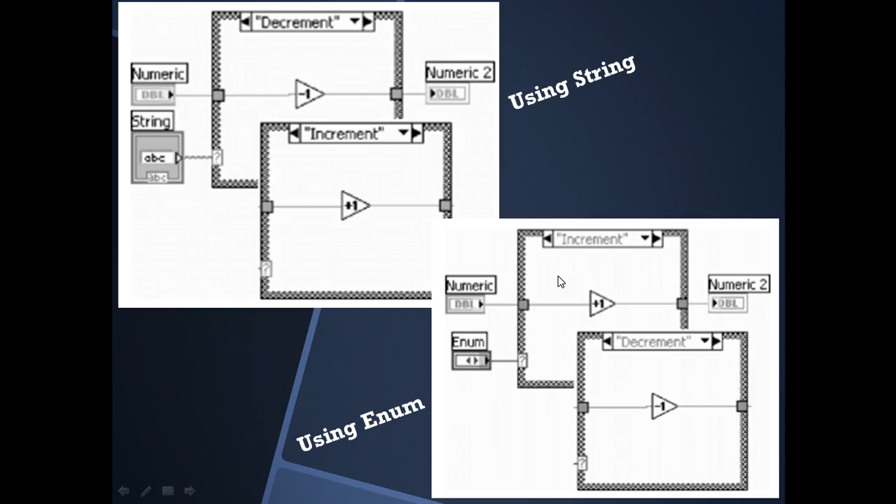This is how the string and enum will look like. For the string, we have to enter a particular name on the front panel. For enum, we have properties where we will declare the values. If we select from a drop down box on the front panel and select any one of them, it will execute that subdiagram accordingly.

We will discuss three examples to understand the case structure better: switching between addition and subtraction using boolean, a simple calculator function using integer or enum, and a seven segment display. We will see these examples in detail using LabView software.

Let us do the step-by-step procedure for creating a switch between addition and subtraction program. Open LabView software and create a blank VI, then press Ctrl+T for equal placement of the front panel and block diagram on screen for better visualization. Right click on the block diagram, go to programming structures, and create a case structure.

Drag and expand it like this. As I mentioned earlier, it will have a true as well as a false statement only.

This is the selector terminal. Go to the front panel, right click, select modern and boolean, then select any one of the switches. Here I am using this switch, and I connected it to the selector terminal.

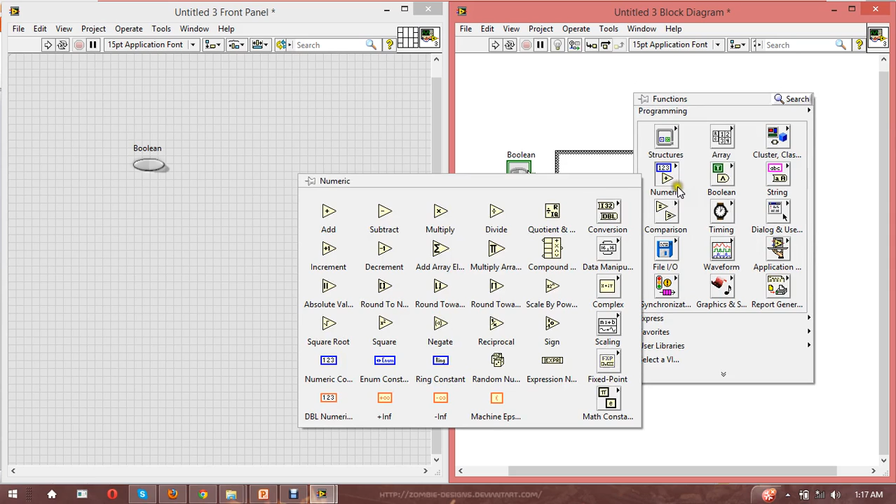Then place the function inside the true and false statements. I right click, go to numeric, and click on addition, placing it in the true window. This function has two input terminals and one output terminal. The same way, I'm placing a subtract function inside the false window.

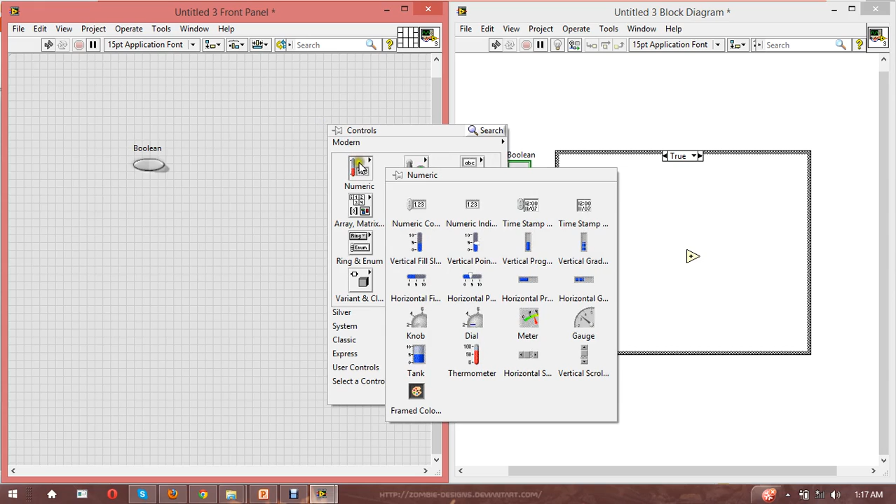For the two inputs, I go to the front panel, right click on numeric, and get a numeric control to place here. The next numeric is required for the second input, so I'm creating another numeric control. For the output, I'm creating a numerical indicator.

Then I'm connecting that numeric control to the case structure like this. Just press it on that case structure, it will attach to it, and I'm connecting that numerical indicator in the same way.

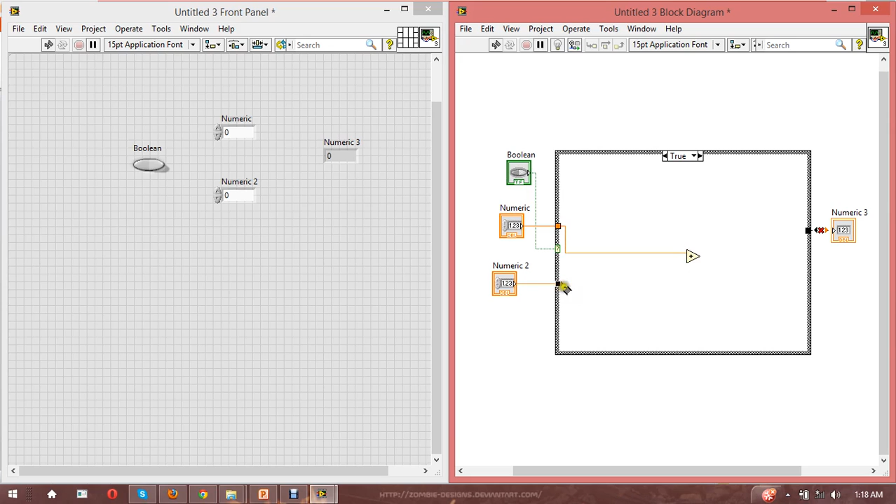Okay, then I'm going to connect the two input terminals to that addition function in the true window, as well as connecting this same two input numeric control to the subtraction function, and I'm connecting the output to the numeric indicator like this way.

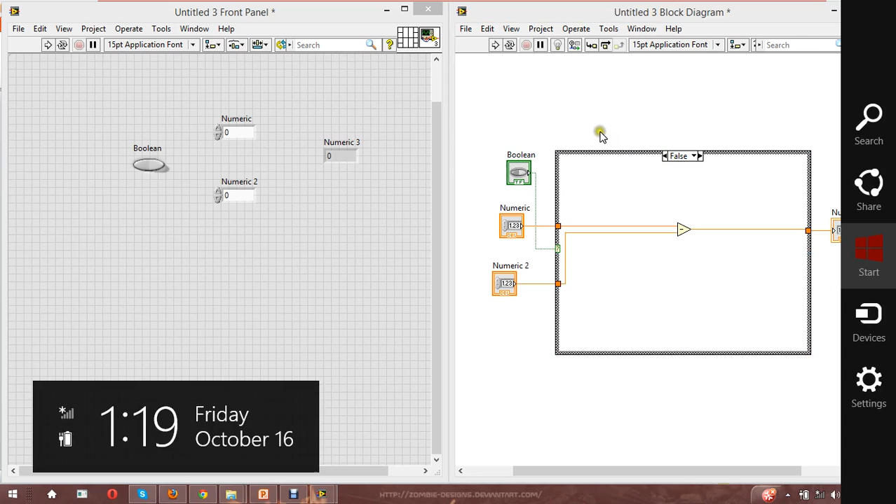After all this, just press Ctrl U for the alignment, and you can change the name in the label as input 1, and this is input 2, and this is an output like this.

For better visualization, we'll go for this one. Right click on this one and click on that view as icon. Same for this one, and same for this one, and same for this one also. This will look a better effect and visualization in the block diagram.

And now I am running this program continuously, and for better understanding we can click this highlight execution icon for the program flow.

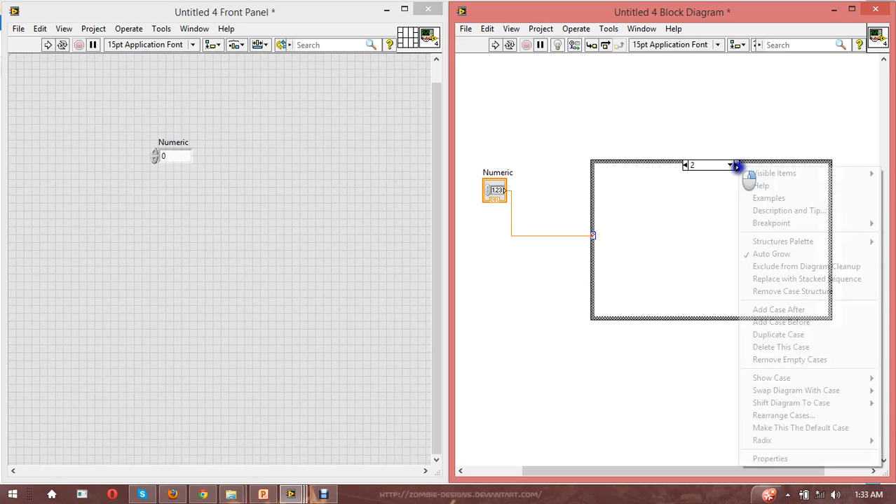Right click on this and add case after. It will add n number of cases like this, and now we can see we added two windows extra, 0 1 2 3, like this one.

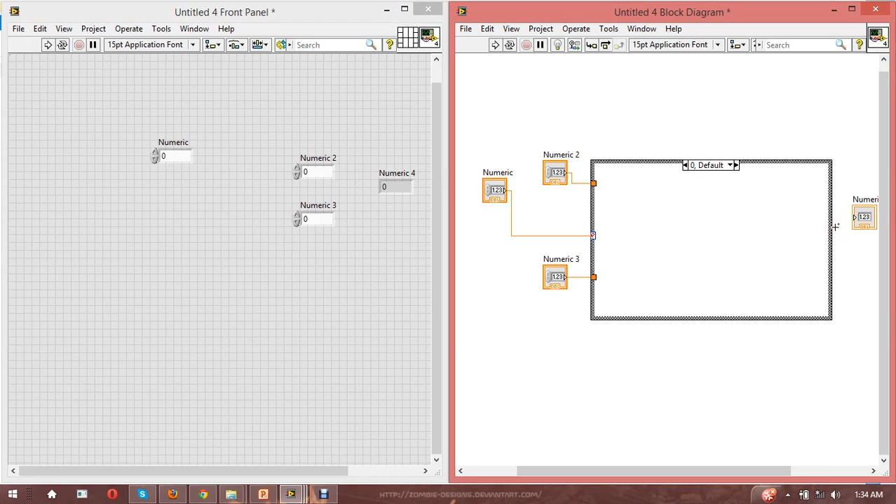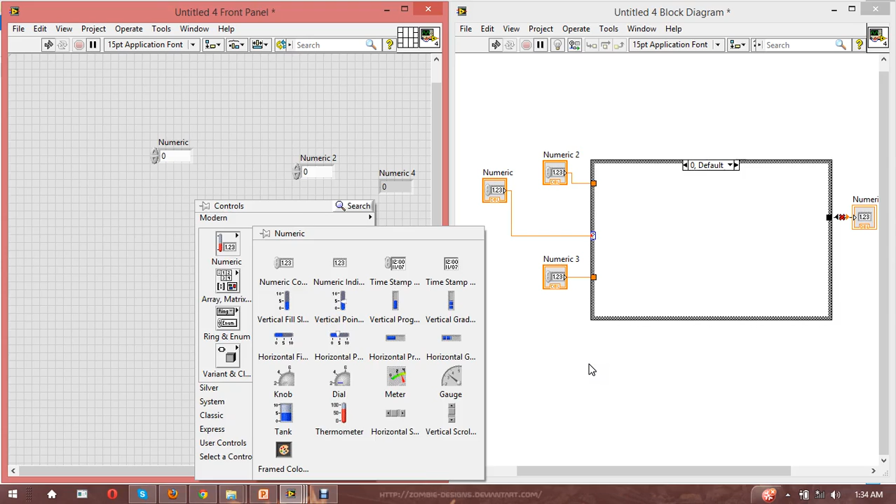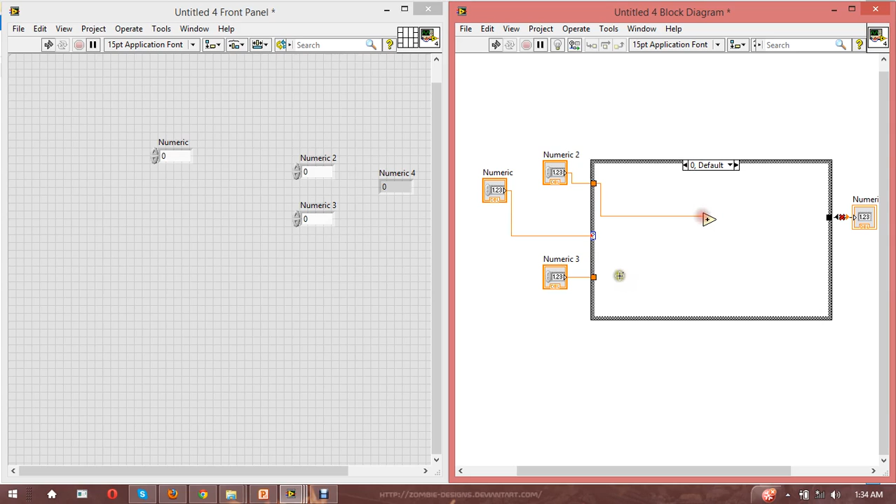The same steps we are going to give two numeric controls for an input like this, and a numeric indicator like this. Hence I'm going to add an add function, subtraction, and I'm going to add like this in way, and I'm going to connect this one like this as in the previous case.

The simple calculator looks like here, I used multiplication, subtraction, addition and division and square function.

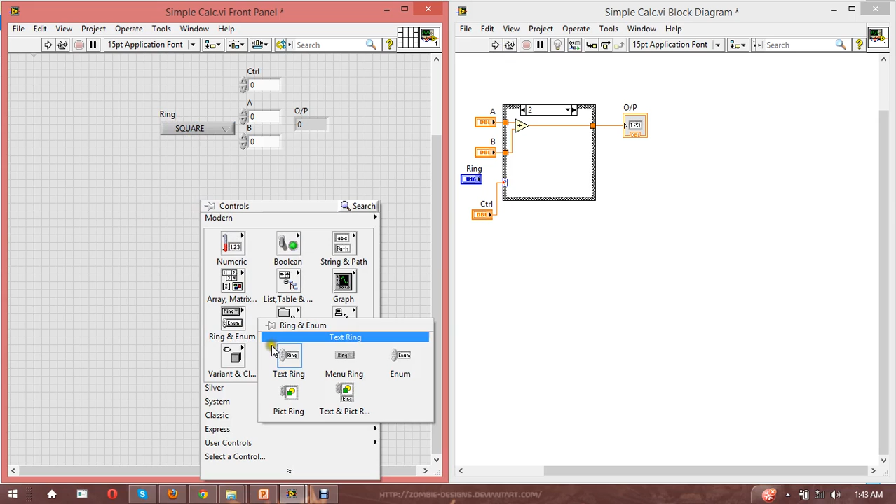Before I run this one, I will explain about what is the ring. For creating a ring, we have to go to that ring and enum, go to that text ring, and place it like this, and right click on this and go to the properties.

It will have an edit items here. Here we are going to insert how many functions we are going to do in that case structure.

After insert, it will come after this one. Hence that we will add n number, and we can add or delete, and we can move it up also like this, and we can move it down also like this, and we have to click OK.

So that I created a ring here. We can give a control to the case structure, or also given a ring to also to the case structure.

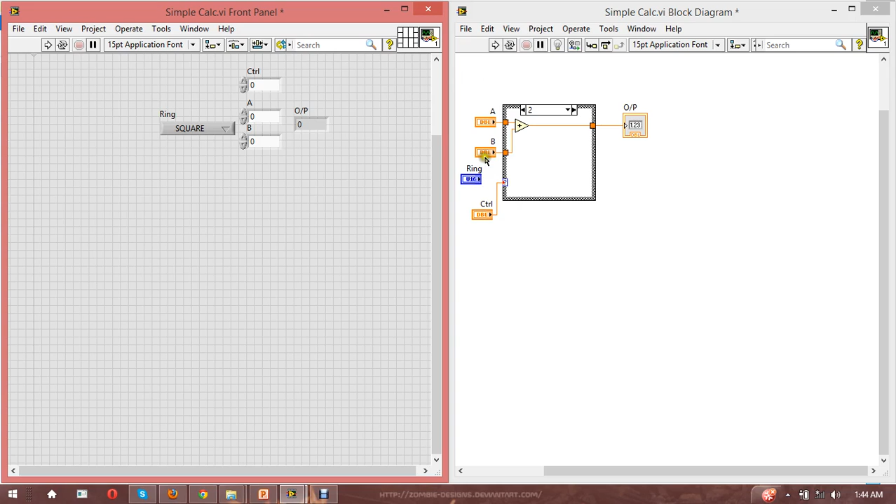First I run it with a control. If I run continuously here, I'm giving an input 5 and 5 here.

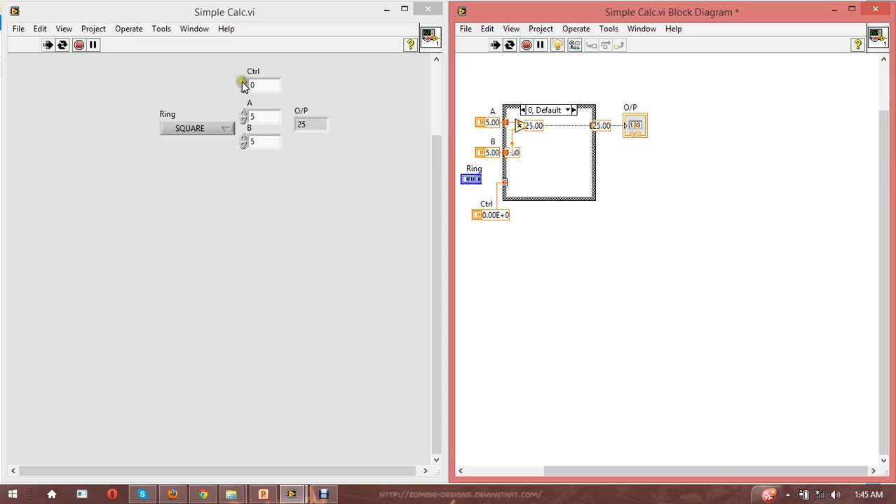Initially I give control 0, which is a multiplication operation, so 5 into 5, the result will be given as 25. Now I'm giving 1. For 1 I had a subtraction function, so I get an output of 0, and for 2 I had given an addition operation, so I get an output like this.

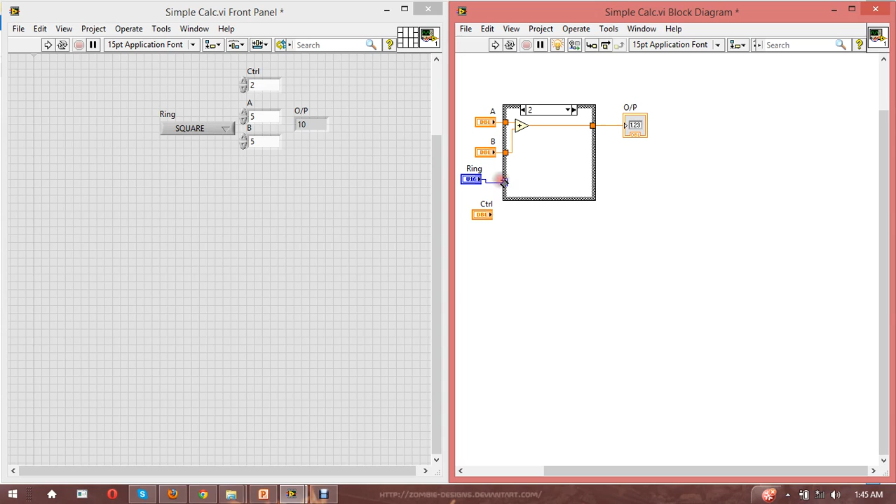So if I connect a ring also, here it will execute the same operation. If I run this one, I can select the operation from the drop-down list box. I am going to select an addition operation here, so I will get an output of 10. If I select a multiplication operation here, I will get an output of 25.

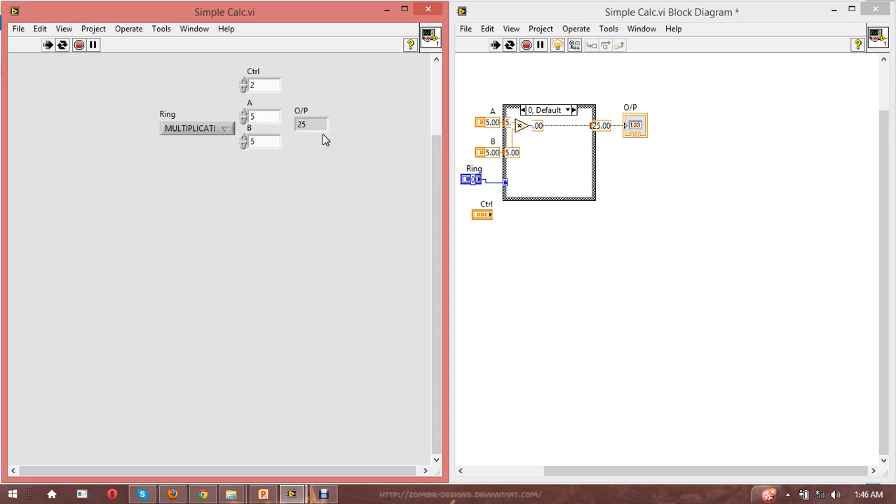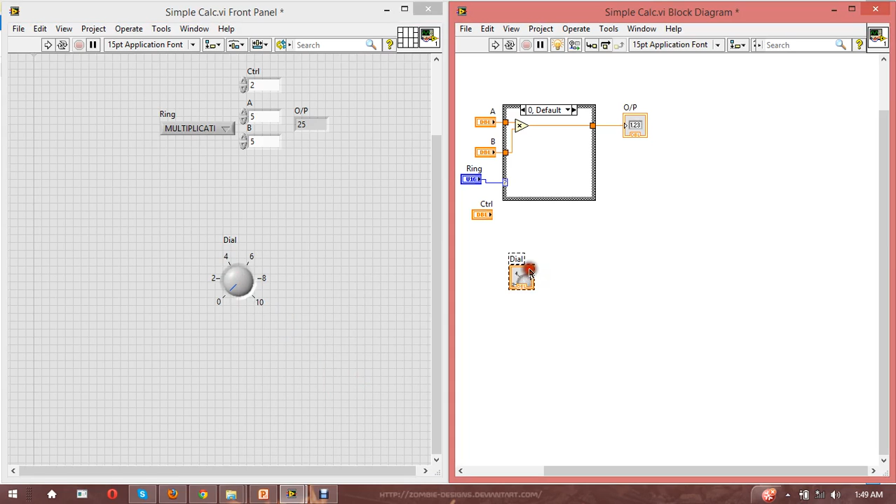And I can do the same operation by using the vertical fill scale, vertical pointer, horizontal fill scale and horizontal pointer, knob, dial. I can use any of these, connect it to the selector terminal, and run. If I select the knob like this, it will run according to it.

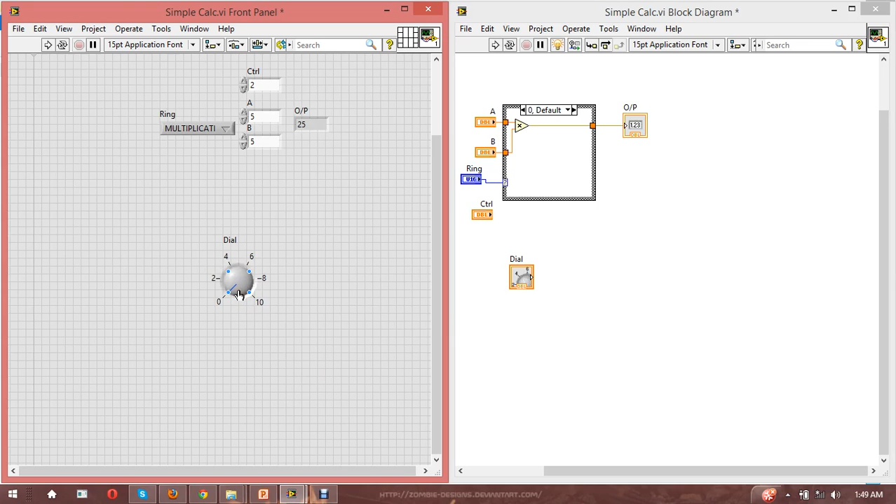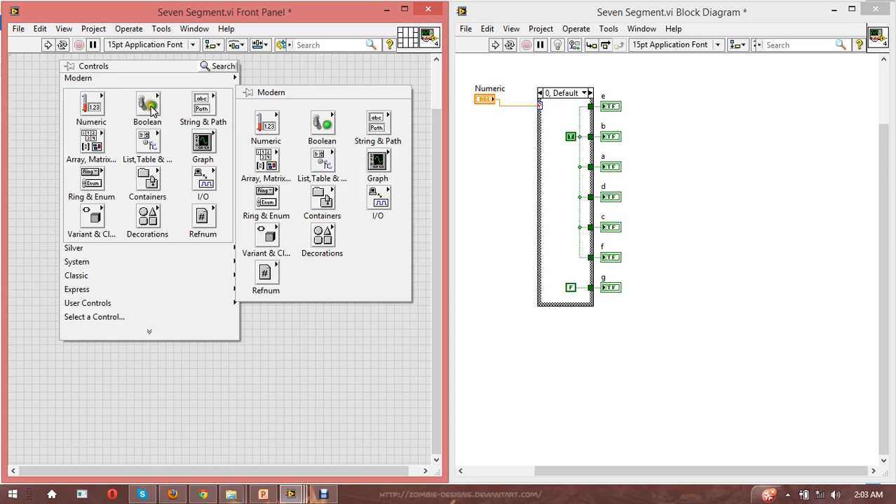Let us come to the third and last experiment, which is a 7 segment display. Here I used LEDs A, B, C, D, E, F, G. I placed them in such a way that they exhibit 0, 1, 2, 3 up to 9. For this, I created a square LED from modern, Boolean. To get this shape, we can extend it horizontally or vertically, and you can place it like this.

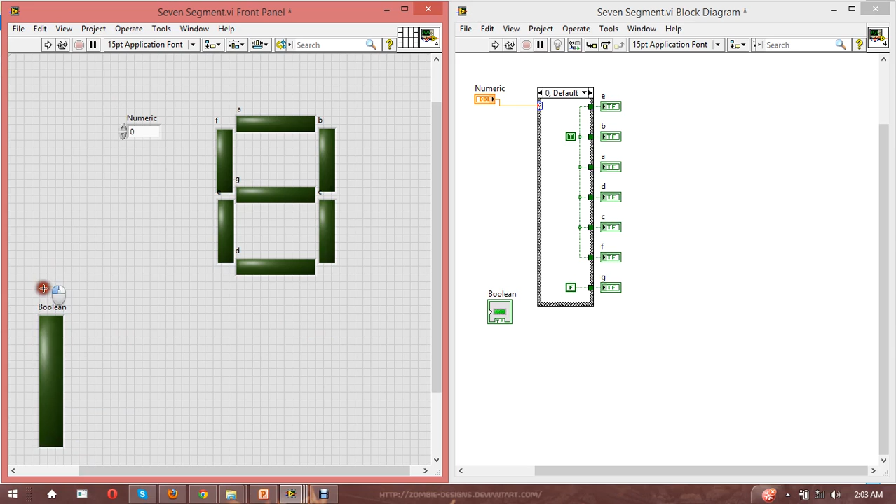And for getting this one, we have to go to Boolean and take true and false constants respectively. I used the true constant here and connected it to E, B, A, D, C, F, and a false constant to G, so that if I execute this, A, B, C, D, E, F will glow for the number 0 and G will not glow, so we get an image of 0 here.

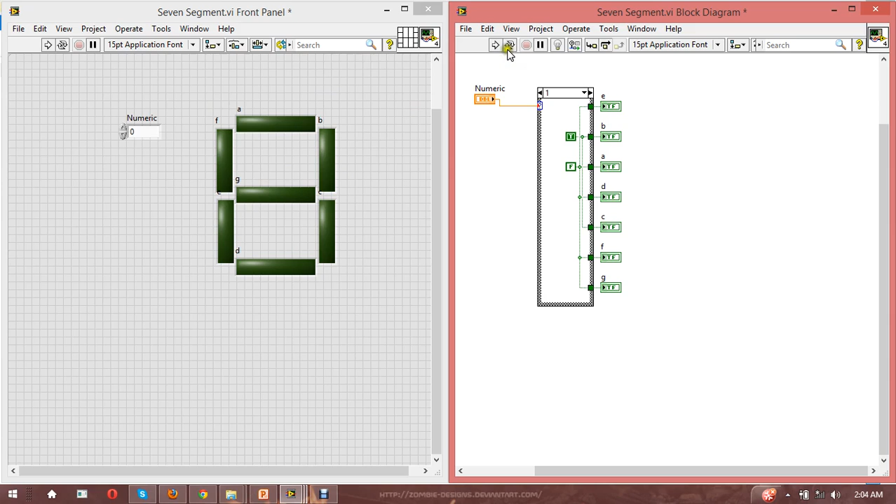And for 1, I connected only B and C to the true constant, and the rest I connected to the false constant, so only B and C will glow and the rest will not. I will show you clearly. Running continuously. See, A, B, C, D, E, F is glowing for 0. If I press 1, only B and C glow and the rest do not.

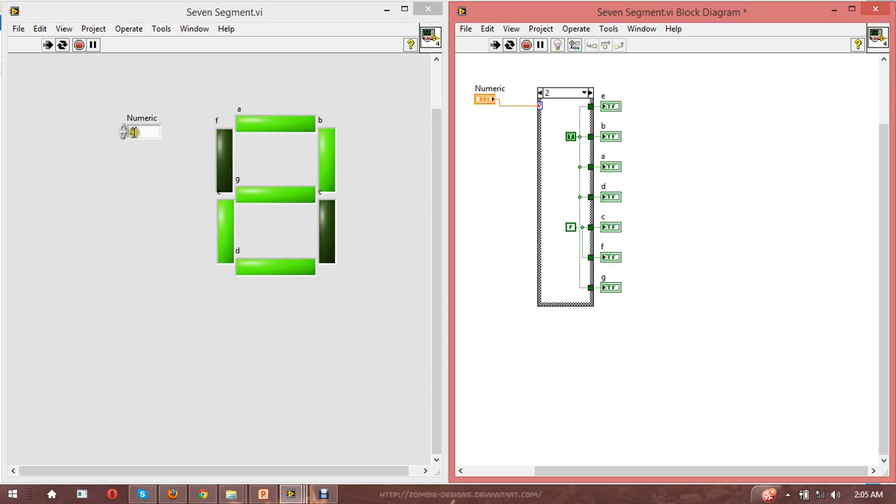And for 2 respectively, A, B, G, E, D is glowing and the rest, F and C, are not glowing, and so on up to 9, I'm getting an output like this.

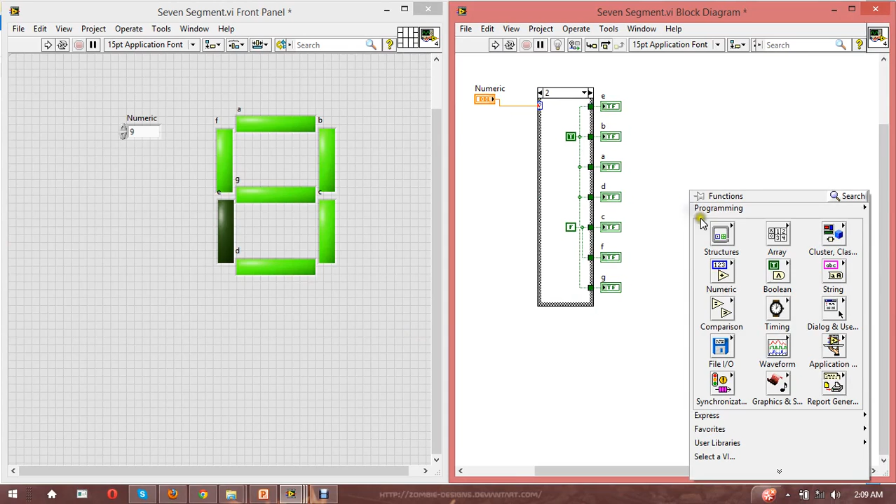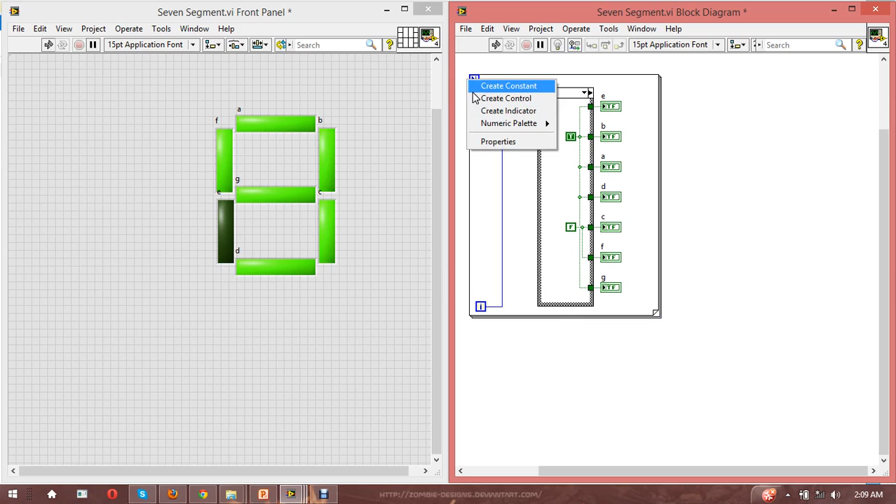We can also do the same experiment by running continuously, putting all those things inside a for loop like this, giving the i value, the iteration value, as an input to the selector terminal, and giving the n value as 10, so that it will run 0, 1, 2, 3 up to 9.

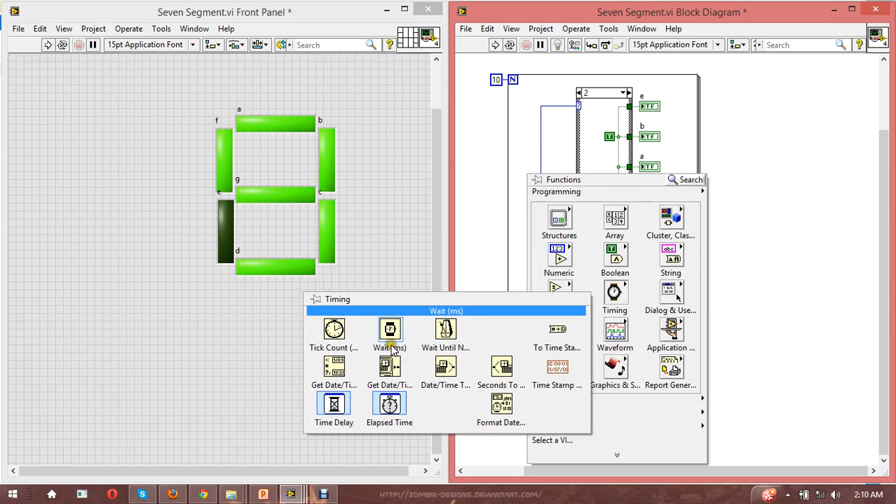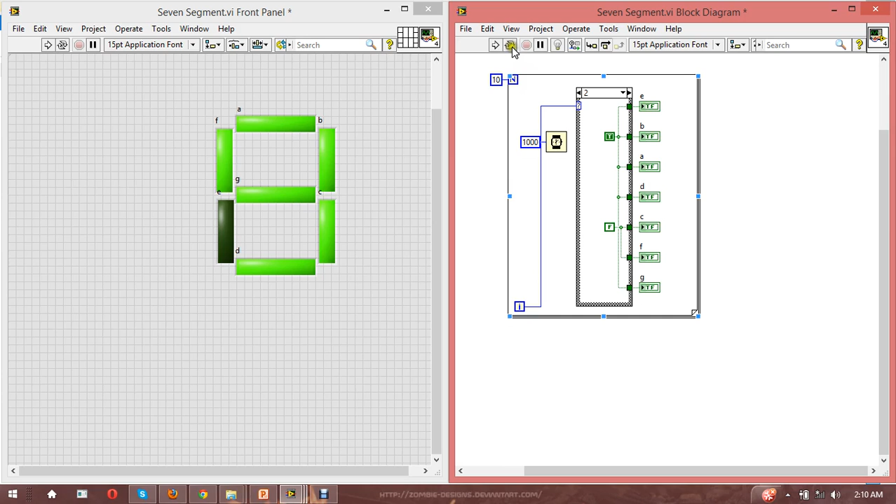So I will show you how it works. Before that, include a time delay like this. I'm going to create a constant and wait for 1 second so that I get a better visualization. So I'm running here: 0, 1, 2, 3, 4, 5, 6, 7, 8 and 9.

I will explain how it works. Here I mentioned 10 as the number of executions, that is the loop count, and this is the iteration terminal. It will count 0, 1, 2, 3 up to 9. We are giving this as an input to the selector terminal. So for 0 the zeroth window appears and runs, for 1 the first window appears, and so on for 2; it will execute 10 times and terminate. We can also add a for loop in the previous case.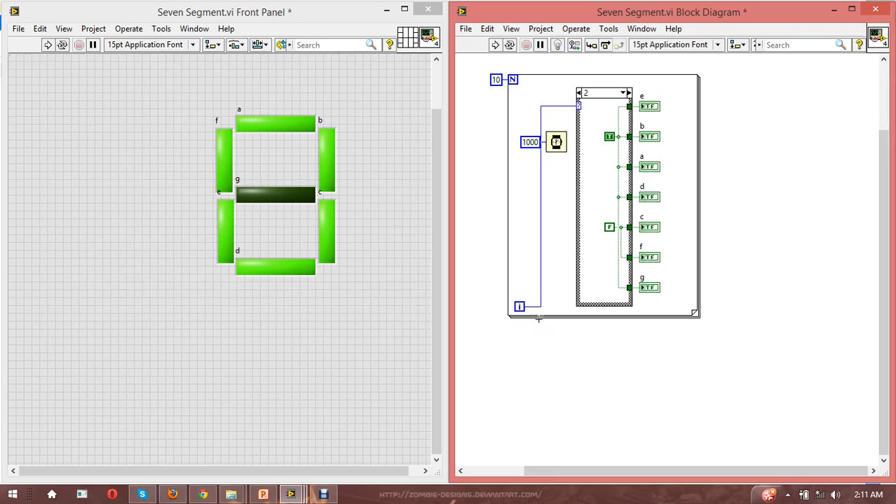And that's it, we came to the end of the session and we got a clear idea about the case structure and virtual instrumentation using LabVIEW. Try out more examples to understand the case structure better.